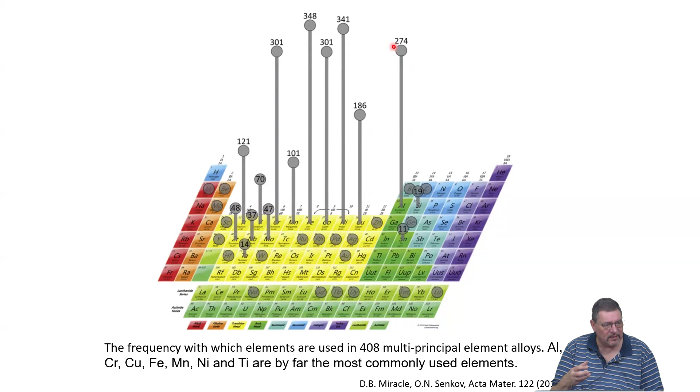This is very important if later we come to analyze the typical phases of solid solutions, because you see that it's only a very small number of elements that are used heavily in making these alloys. So it means that the structures these elements prefer will obviously, or maybe not obviously, control the phase formation in the high entropy systems being made.

When we look at this, maybe it's not very visible on screen, but this is actually a box, and this is another one. So again, many high entropy systems are made of 3D transition metals, and they are the most abundant when you look in the literature.

Refractory CCAs and refractory high entropy alloys are much less abundant, much less investigated. So there is a lot of work to do in terms of their microstructures, phase transformations, mechanical behavior, diffusion behavior, all of these aspects.

Then there is a rather small number of, for example, precious metal CCAs, making a high entropy alloy or compositionally complex alloy just based on precious metals. This is, for example, if somebody wants to make a new catalyst and wants to leave out certain very rare precious metals, people are trying to use the high entropy concept to make a replacement with similar properties but less cost.

And then also low density CCAs, based on elements which have a low density by themselves, are also there, but not in abundance. So there are not many of those reported in literature.

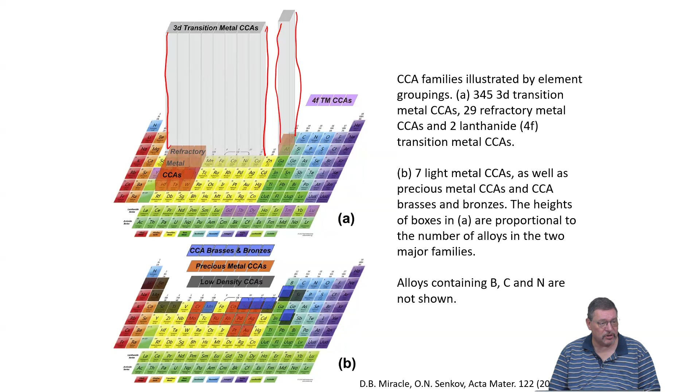We discussed already that there are different conditions relying on different properties in terms of stabilizing complex solid solutions. This mixing enthalpy as well as the difference in effective atomic radii in solution are the two most important, I think. The similarities in these properties between different atoms and atom pairs control whether you can easily make a solid solution or whether you will probably find formation of an intermetallic phase, which most of the time is to be avoided.

These more complex structures are very rare, and often they form as precipitates in given high entropy systems when they are annealed at lower temperatures, so that they go from single phase to two-phase or multi-phase structures, especially decoration of grain boundaries, triple junctions, and so on.

This is not related to the fact that FCC or BCC have special structures, in my opinion, but because the elements we use to make these solid solutions have to have similar properties that favor FCC or BCC structures. This is why I think we see these phases in abundance.

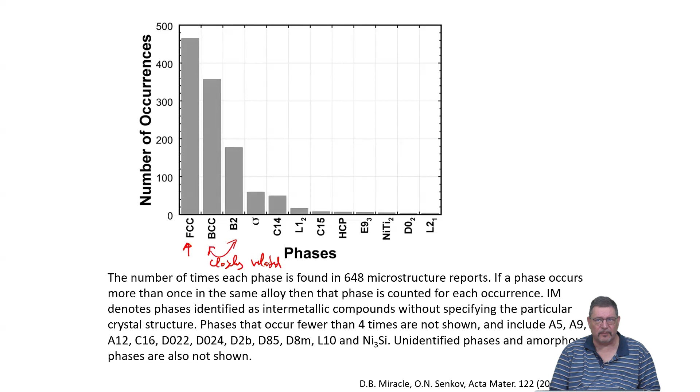There's no magic about these structures, FCC or BCC. It's what people in the literature call the structure in, structure out approach. It's a hand-waving concept where you take alloying elements that have, in their natural single element case, a preferred structure - that's the structure in. If I add several elements that prefer the same structure in, this will most likely result in structure out in the phase of the solid solution that forms when mixing them.

This structure in, structure out thinking seems to be fulfilled for many high entropy systems. Even though, as I mentioned yesterday, for the Cantor system it's not that the majority of elements in their natural form would be FCC, but still the similarity between these different elements is there. Nickel, for example, is a good example of something which really strongly prefers FCC structure. So this approach seems to work.

So when you think of trying to make a high entropy alloy with a specific structure, and you think about which elements to choose, think of the radius in solution. How is the mixing enthalpy between this element you might add and the given elements to make a solid solution alloy? Is the crystal structure, especially close to the melting temperature, of that additional element close to or identical to the crystal structure which the other alloying elements form? If that's fulfilled, this is maybe an excellent choice for getting a solid solution.

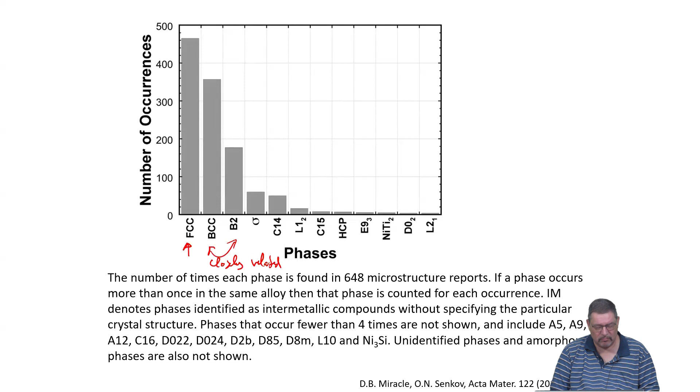So alloy design in multi-component space is still relying a lot on estimating things and having some experience. But these empirical rules, which don't really have a good physical foundation, are working. A working approach is never to be sneezed at. This is what one can easily do.

This is also confirmed if we look at the comparison between experimental observations of phase content and estimated content. Observed content means either experiment or CALPHAD simulations, and estimated content is this structure in, structure out approach, which you can do in experiment but also based on CALPHAD calculations. You see that basically this grayish line lies in between these different data points.

For CALPHAD, there are two sets of data given: this factor FAB equals 1, or FAB equals all. That means the fraction of data sets which have been assessed of the binary A-B systems that make up your 5-component system. So if all 5 binaries have been thermodynamically assessed - completely calculated by CALPHAD and confirmed that reality matches the CALPHAD calculation - then FAB would equal 1. So a fraction of 1 means all of them have been assessed.

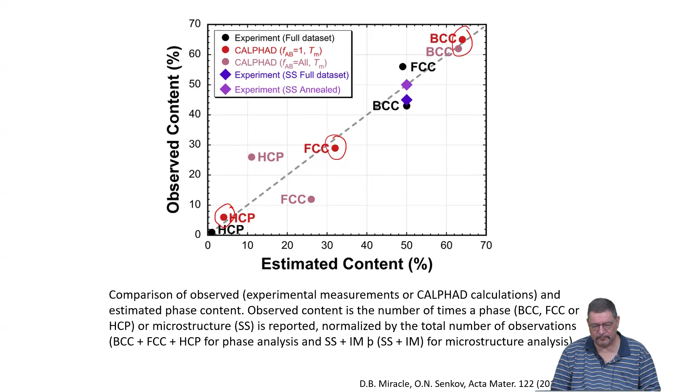Now, when we were talking yesterday about conditions for selecting elements to bring together, to mix in an alloy to make a high entropy system, we were talking first about these delta values for the mixing enthalpy of the solid solution, delta HSS.

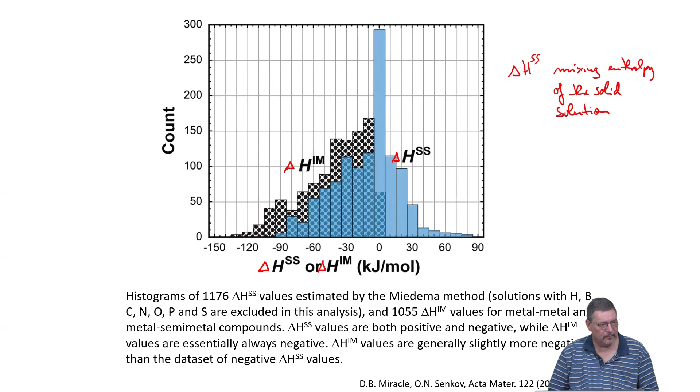And then we have to compare it, obviously, to the formation enthalpy of intermetallics, which are possible inside of the system. You see that they are comparable, but that on average the formation enthalpies of intermetallic phases in these systems tend to be a bit more negative, which means this is the hard job for the entropy of mixing to keep up and prevent intermetallic phases from forming.

This is why at low temperatures in all of the high entropy systems, you expect additional phases to form. Sigma phase is one example. So this will be, I think, a general trend and tendency.

The time for forming these intermetallic phases at lower temperatures might be very long, because the diffusion coefficients of the elements inside these materials is very low, and you need diffusion, you need atomic mobility for the phase formation to occur. So the comparison with these predictions is a little bit difficult, because you never know ahead of time how long it takes.

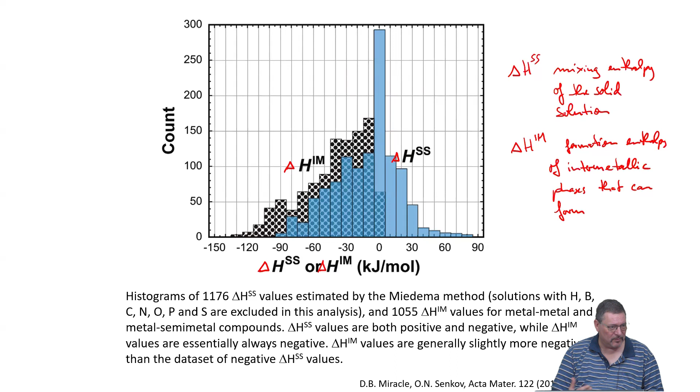In the literature we have very similar concepts which have been introduced many decades ago, and they have been reformulated not so long ago by Professor Inoue from Japan, but it's basically still going back to old rules by Turnbull, who did this in the 1950s and predicted in the 60s which ratios of properties would favor metallic glass formation, because at that time it was still not yet confirmed that you can make metallic glasses.

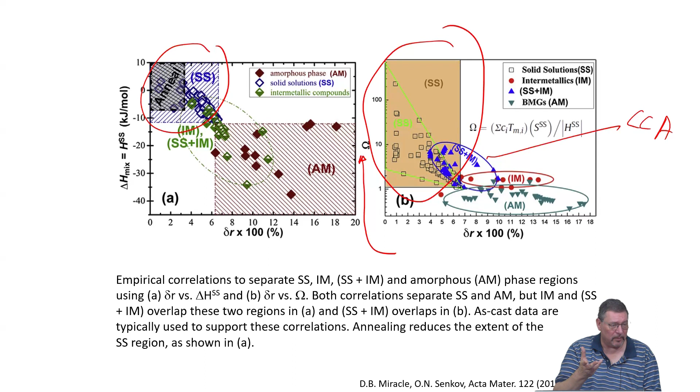Suppose during printing, during solidification, cracks will form. Yes, that is also a possibility, that is always a possibility. So then you have to basically change processing conditions. It's not related to thermodynamics, it's just about intrinsic strains. You maybe have to think about how your cooling method is affecting crack formation, whether you need some stirring, or whether you need to do Bridgman solidification to get closer to equilibrium configurations, which avoids building up stresses so much.

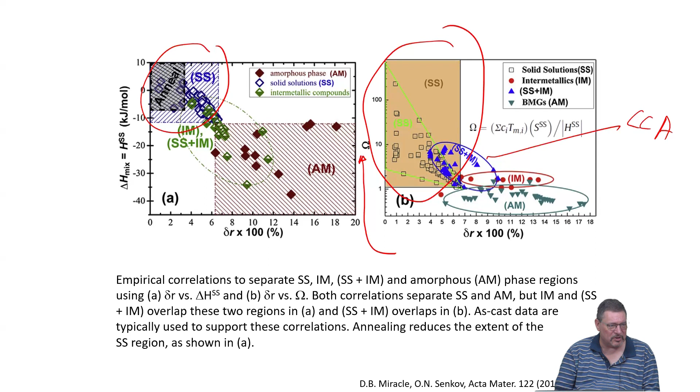This brings us to preparation methods, and I think in general they would not differ much from what you do for conventional alloys. So if you want to make a good high entropy system alloy, constituent selection is really the most important aspect.

They are chemically complex, so you have to think of putting different elements together. Different elements have different densities, so you get buoyancy effects, you could get segregations. So you always go through this iterative cycle: you try out a certain alloy with a certain number and type of constituents, you try to make it, you look at the outcome, you see cracks have formed or segregations are there, and then you know some improvement must be made. So maybe you go to a higher soaking temperature, soak for a longer time, or flip after initial melting several times so that the density differences get levelled out. Only by this repeating and improving can you get the best alloy.

Obviously this is counter to any industrialized process because it takes time and costs money. This is the difference between doing fundamental research and industrially applied research. This is why industry doesn't like at all to go to new alloys and new compositions, because you have to go through the whole process and optimize all the parameters to get a good product. This means that alloy development is mostly done at research institutions, or maybe companies together with people in research institutions, but very few companies really do this themselves.

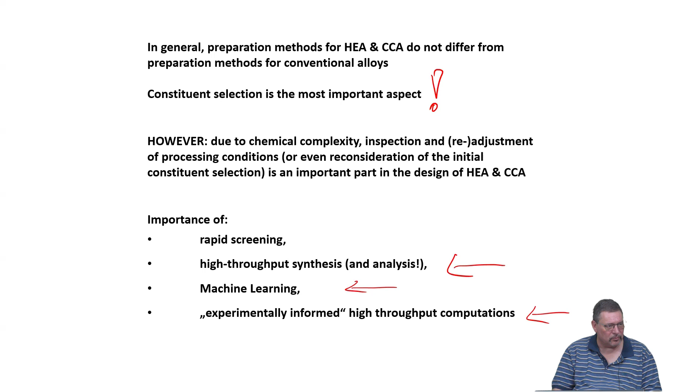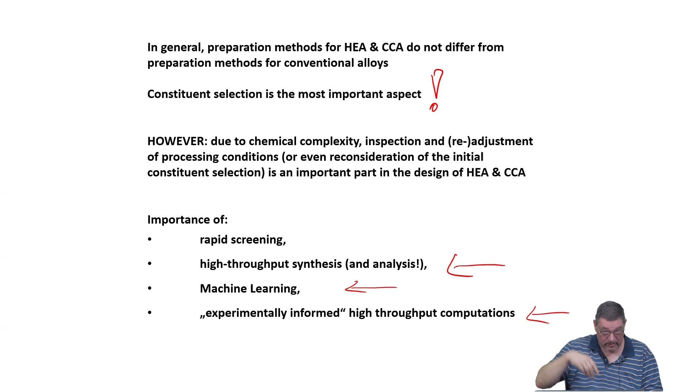In the coming years, it will become even more important to have machine learning as well as experimentally informed high throughput computations, but also synthesis in high throughput and analysis in high throughput. By deposition processes, you can make libraries of materials on a single substrate, going from pure element to maybe Cantor alloy in one go just by changing the deposition rates of different elements.

The big issue here is how to relate thin film behavior to bulk behavior. This is not easy because you have additional stresses, a huge surface area, different diffusivities, and maybe different quenching rates if you deposit the film, as compared to bulk processing. So one has to be very careful there.

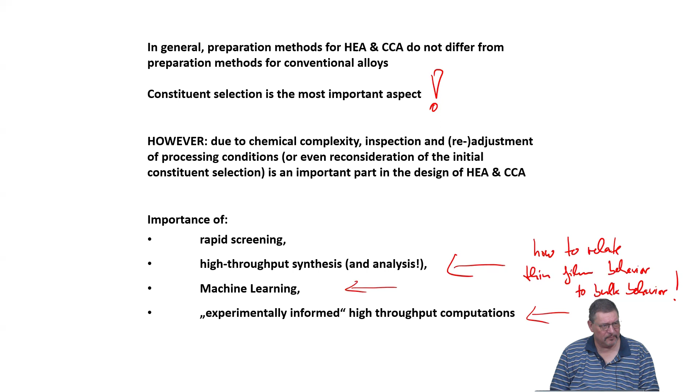This is done in abundance all over the world, but I'm skeptical. This is the typical general synthesis route, and for high entropy systems, mostly mechanical alloying, these typical classical solidification methods, thin film deposition methods, and in the middle, bulk casting and additive manufacturing are the ones which are used.

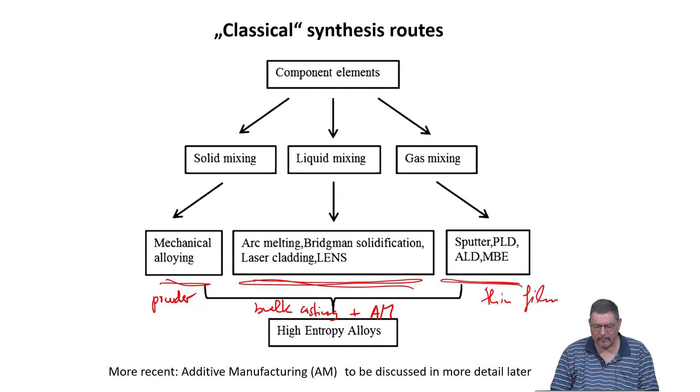So arc melting, you probably know. It's obviously a process which works very well. You just assemble different ingredients and use a high power electric arc to melt the material while it's situated on mostly a water-cooled copper plate. Then you go through the liquid phase, and once you stop the beam or take it away, the material freezes again.

When you did this yourself, what are the problems with this method? This is a very common problem: copper diffuses into the material although the copper plate is water cooled. If you go to very high temperatures of your ingot, for example melting high melting point materials, you cannot prevent copper from going into the material because the heat cannot be taken out quickly enough. Then arc melting is really a difficult problem—if you don't want copper in your material, it's very, very tough to prevent. So for me, that method is good for something up to the melting temperature of iron maybe, but if you go higher, it is very difficult.

If you have components of very different melting temperature, it's also a problem because you will have selective evaporation of the component with the lower melting temperature mostly. It means the stoichiometry of the ingot you produce will not be identical to the nominal composition you put in.

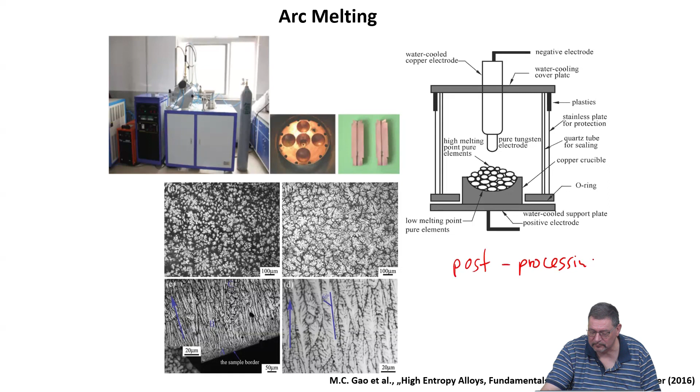I recommend not only doing a homogenization treatment, but once you have melted the alloy several times so that you have compositionally homogenized it, it's normally a good method to severely deform the material by rotary swaging or hammering, and then do the homogenization treatment. Or maybe do homogenization annealing, then deformation, and then relaxation or recovery annealing, because that will give you not only compositionally uniform material, but also microstructurally much more uniform material than if you do not include this mechanical plastic deformation treatment in between.

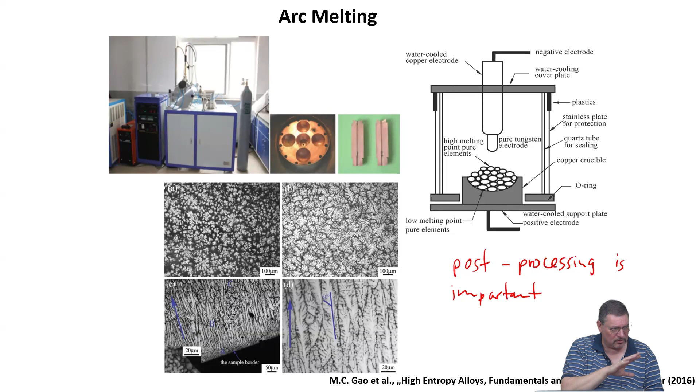This has a huge impact on diffusion rates, as we found out. The diffusion rates which we measured without doing this intermediate deformation step were much different than for the material going through the full cycle I just described.

A very good method if you want to avoid these non-equilibrium artifacts is Bridgman solidification casting, which means that you basically pull the material from a liquid zone through a solidification zone and cool it, but cool it gently and not so quickly. So you have control over the speed of the solidification front.

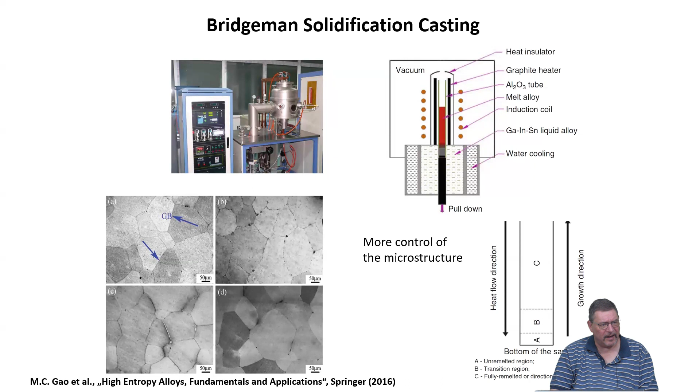That normally gives you good materials in terms of equiaxed structures, non-dendritic structures, good sharp grain boundaries, and also nice dihedral angles or tetrahedral angles at the junctions of grains, as shown here.

So depending on how fast you pull in this Bridgman solidification casting, you get different patterns of the microstructure in this high entropy alloy. The faster you pull - and D would be the fastest - the finer microstructure you get, because you allow the least time for the material at the high temperatures to form the local structure.

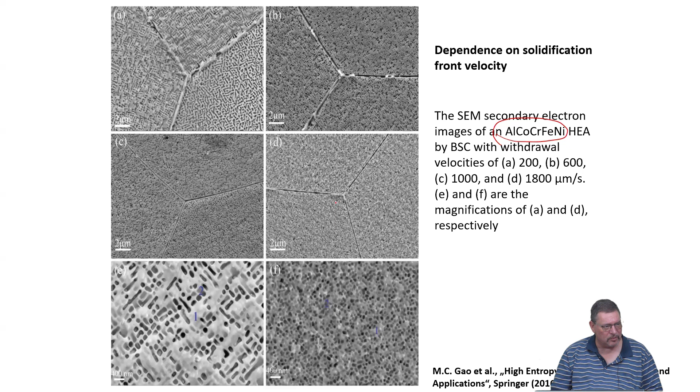It depends really on the alloy what you have to do, because sometimes you want these features to be larger or smaller, and then it means you can play with the solidification front velocity in this Bridgman solidification to obtain the microstructure which you like to have.

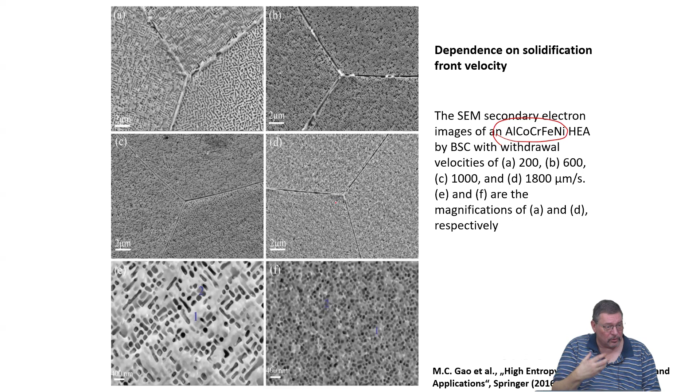In alloys made by this method, you don't need this deformation process in post-processing, because then you would destroy the microstructure, right? So you have already used a process that makes an optimized microstructure, and it gives you control over the resulting microstructures.

Laser melting and laser cladding, very similar to additive manufacturing really, is basically you have some powder which comes through this nozzle, and you have a laser beam which melts the powder at the place where you want it to form some material. So it's like a directed deposition, like we also have in additive manufacturing.

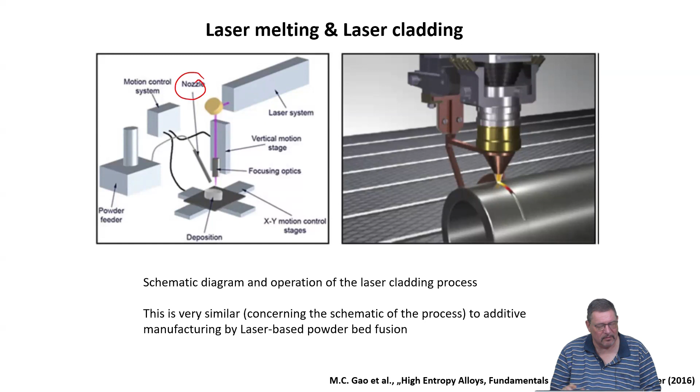Obviously, we have all the pros and cons as for arc melting here, because also rapid solidification, directed heat flow during cooling - microstructures that form are probably far from equilibrium. So again, one needs to do some post-processing treatment if you are not interested in this metastable microstructure. If you want a stable microstructure, you have to do some annealing, maybe even rolling and annealing, in order to form a good equilibrium structure.

And otherwise, it's often that you see dendritic type solidification structures, which again tell you there was a rapid solidification process and either constitutional or thermal undercooling, so the solidification front became unstable and dendrites formed.

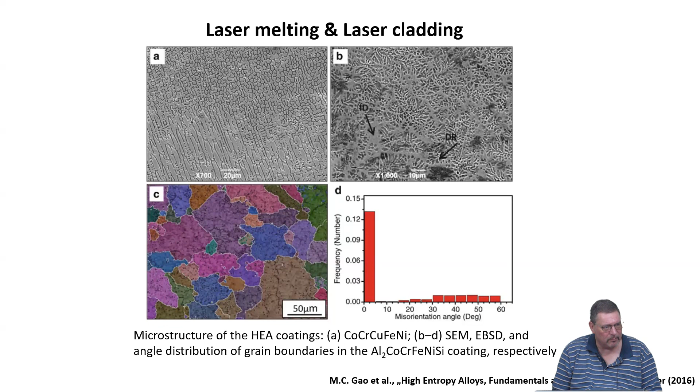If you want to do powder metallurgy, you all know ball milling, and there are two general types: it's like a tumbler or an attritor ball mill. They just differ in terms of how much energy you put into your material, which you either blend or severely deform.

Whenever one does these experiments, one has to be aware of restrictions. This is typically a process that occurs far from equilibrium, because you transfer a lot of kinetic energy from the balls or from the mill itself to the powders, which means defect densities are exceedingly high. Local temperatures could become very high with associated very high cooling rates. So the whole material is in a non-equilibrium state very far away from equilibrium, and so you could get metastable phase formation, amorphization, and so on occurring.

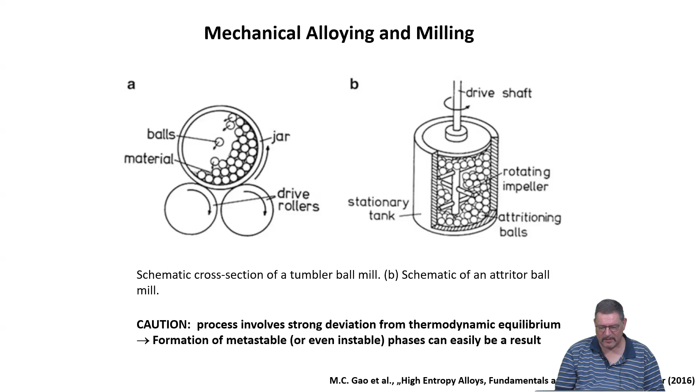But also you always have some material from your mill or from the balls inside of the mill abraded and mixing with your original material. So it means you can never avoid some impurities from the materials the mill or balls are made of going into your material. If you're fine with this, or if the mill is steel-based and you have an iron-based alloy, then maybe it's not such a big deal. But if you don't want iron in your material, maybe use a different ball mill - there are some based on tungsten carbide, and then you can avoid getting these mixing effects into your material.

You can also use pulsed laser deposition, again using a laser to evaporate from a target and then deposit on the substrate. Or you could thermally evaporate different materials in effusion cells, Knudsen cells, and then have a small pinhole so you can direct a beam onto a substrate, and depending on how many sources you have, you can basically mix different alloys.

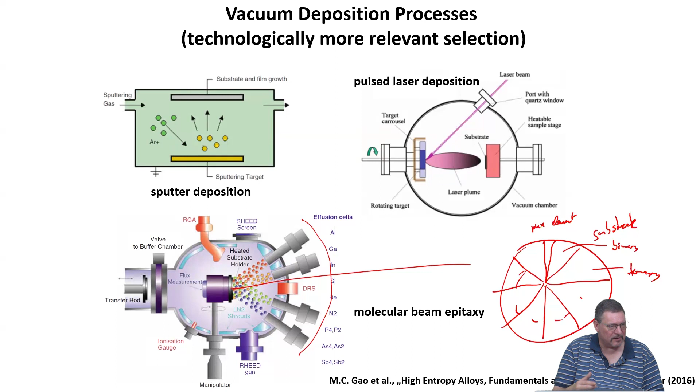Additive manufacturing is very hip these days, and everybody investigates it. It is basically similar to laser cladding, right? I mean, you cannot only use lasers, you can use all kinds of energy sources in order to do the additive manufacturing.

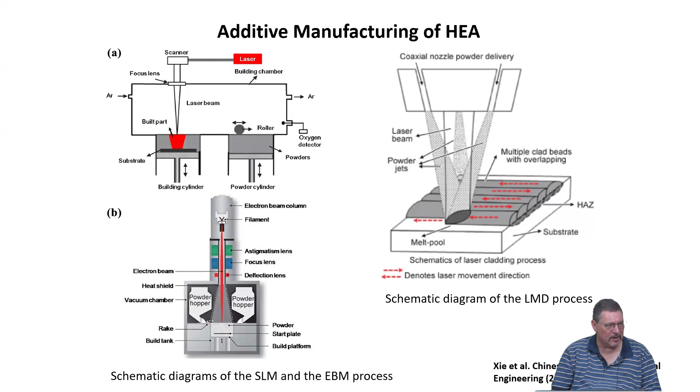I think most people using high entropy materials use this laser-based process, powder bed fusion. So you basically have a powder of your material you want to make a structure out of. You put it down in a layered fashion, and then you scan with a high power laser in the regions where you want to create a structure. It melts, it freezes, and you take the rest of the powder off. You can even reuse it, and only the structure is created in the positions where it should be. So you don't need to machine out material, especially for high cost materials like high entropy alloys - this is a favorable way to go.

And let's see if this works here... No, unfortunately not. Well, this was showing the process. Okay, thank you. Can I do it like this?

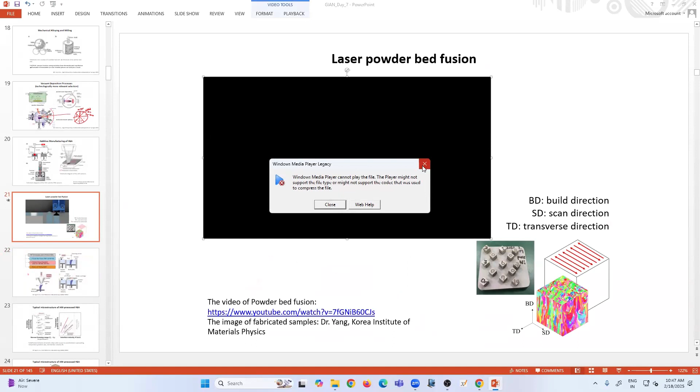Sorry, on my laptop it worked, but here it seems not working. But basically, it's showing you this setup of how the laser works, because this powder is then distributed.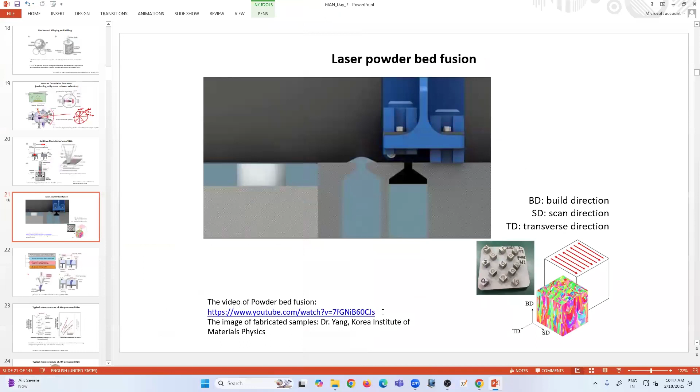Powder is distributed along this direction. Then this slider goes back with this one lowered. It basically scrapes off the powder which is too much, and it falls here into this container so that it's not wasted.

And then basically the laser comes down and melts the powder in the regions where it should be melted. And then the next powder is applied, and so on. And so you build up these structures, as you can see here.

The problem here is that you cannot avoid obtaining structures which have a very, very anisotropic microstructure, because the heat is extracted in this direction, a little bit in this direction, and a little bit in this direction, but mostly in this direction.

And the next layer will again deposit heat, and the next layer, and the next layer. So it means you will always see the tracks of your deposition melting.

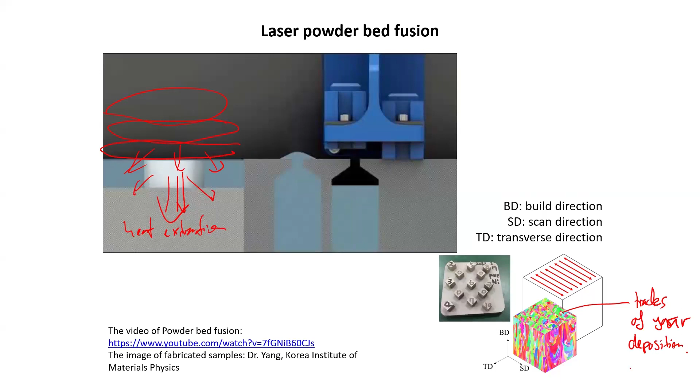And you will also see the outcome of the heat flow. And that gives you a very, very complex microstructure.

Also with a lot of defects because of the rapid shrinkage and rapid solidification. So you introduce a lot of strain because of shrinkage going through the liquid to solid transformation and due to the cooling. And that means you create strain, which can also introduce huge dislocation density.

So the strain is actually large enough to go above the elastic limit into the plastic regime. And this is a highly defected structure which you get.

So it means that when you want to use it, you probably have to do some post-processing, which is against the idea of additive manufacturing, because you would like to take the part and put it into your device, but this is probably not going to happen.

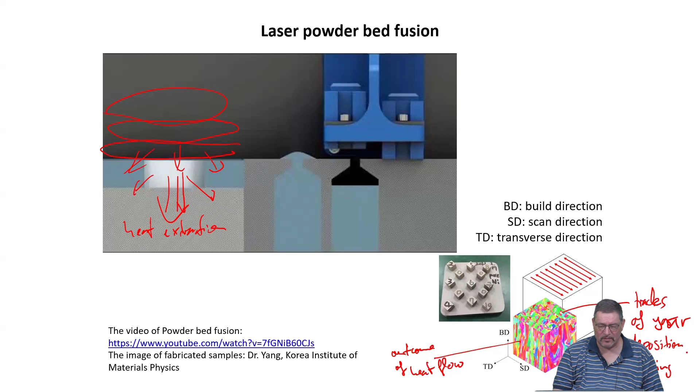This is not only true for the high entropy systems, but also for others.

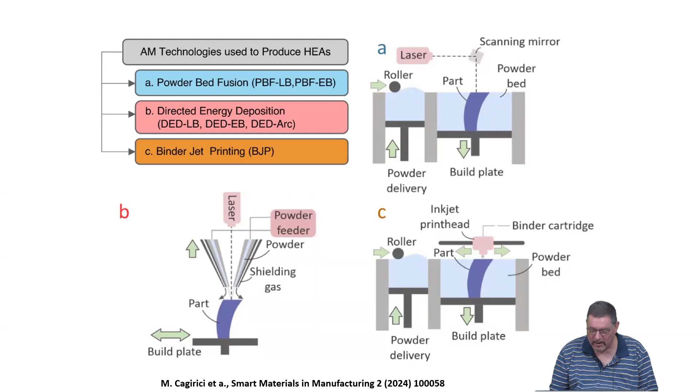Yeah, and again, different ways of either directed energy deposition, so you don't have a powder bed, or powder bed parts. In principle, they all have the same benefits of making materials without having to machine them in much strong way afterwards, but also all of them suffer from creating non-equilibrium structures.

And depending on the increasing constitutional supercooling, which is proportional to... it's really related to many of the processing parameters, like how do you deposit the energy, how much of the energy do you deposit, and how much time you give the system to either melt or cool.

You will get additional different constitutional supercooling. Normally cooling speed is proportional to supercooling, and then you get from a planar equilibrium structure something which is more related to Bridgman solidification, to something which might be very dendritic, similar to what you get in arc melting or laser cladding.

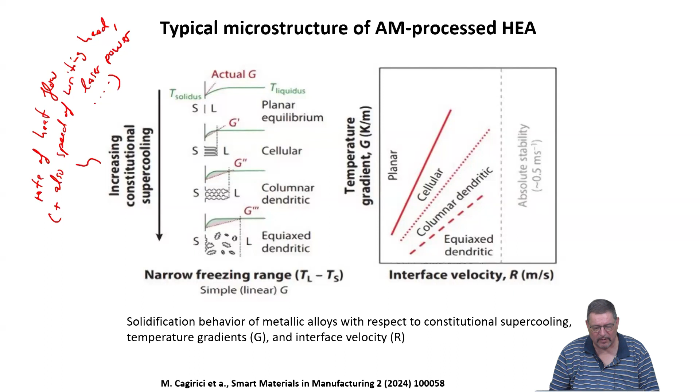And obviously one does not like to have very dendritic microstructures. But yeah, this is what you typically get in microstructure evolution of an additive manufactured processed high entropy system, and that's actually now a two-phase high entropy system.

It's a eutectic high entropy system. And you can see that the microstructure variation is quite large, right? So the properties of this material would depend a lot on whether you look at the properties in the transverse direction or building direction, because of these non-equiaxed structures that form.

So you have elongated grains, you have dendrites which form. So it can be messy in terms of the microstructure you get from additive manufacturing.

And one needs to really always analyze also the microstructure in all three different directions in order to get a full image and full picture of what really is the microstructure of the material. Just doing a planar cut through the microstructure like you normally do, polishing and looking at the cross-section, is not enough. You have to look at three cross-sections which are perpendicular.

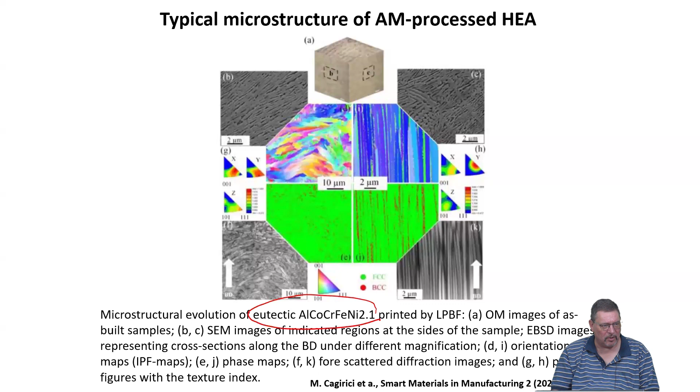Now, we also thought that single-phase and multi-phase high entropy alloys—while multi-phase is not really a high entropy alloy, this is why it's in parentheses.

So single-phase and multi-phase compositionally complex alloys are important to look at, especially because for properties and property optimization, more and more it's recognized that a single solid solution phase will not fulfill all the needs.

And we can use all the tricks we have learned from conventional alloys to make properties better also in high entropy systems by having second phases forming. Important is what I already indicated, that we then have to worry about the formation enthalpy of the intermetallics.

And they shouldn't be too much different from the mixing enthalpies of the elements when they form a solid solution phase, because otherwise they will dominate and only this, and then all the residual ones will form. And this is not what you're going to have.

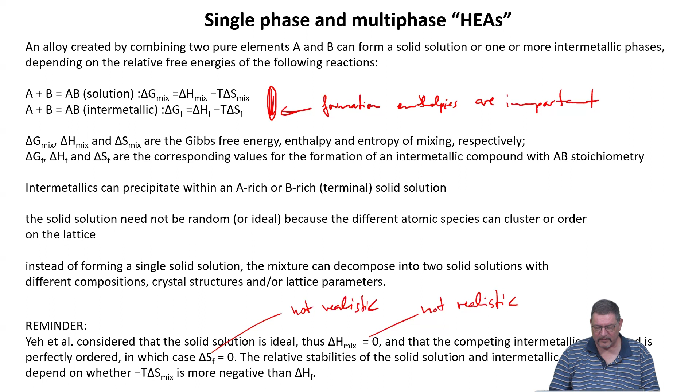So again, this is difficult, and this is what can happen, right? I mean, if we only place 2 different types of atoms onto a common lattice, so we form a solid solution, then different processes can occur. If we have slightly higher mixing enthalpy, positive mixing enthalpy,

then we can, in the solid solution, get spinodal decompositioning. This means it basically forms 2 different solid solutions, different in terms of their chemical compositions, because the system would tend to go to these 2 compositions.

We could have the situation that energetically it's more favorable to have more than 1 solid solution present. So this would be something like eutectic.

High entropy alloys. So you have 2 phases that coexist together, and both of them have multi-principal alloying elements. You could get to intermetallic and solid solution forming 2-phase equilibria. So it means CCAs would be this type of thing.

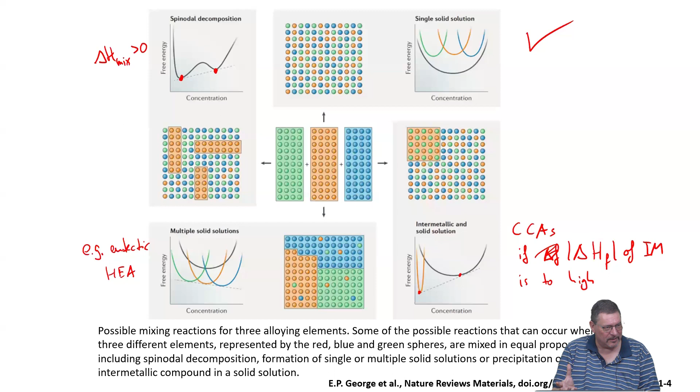If the formation enthalpy, the magnitude of the formation enthalpy of the intermetallic is too high, or we could get a high entropy alloy as a single phase solid solution. And all of these possibilities depend just on the thermodynamic quantities, but the thermodynamic quantities also depend on atomic radii, which are effective values, and depend on electron concentrations and so on.

When we now think of dual phase high entropy alloys, this is something which I think is more new, especially in iron containing systems, sometimes iron based systems. These studies have been like a continuation from steel-based research, because if you think about steels, some of them actually have rather large concentrations of additional elements in addition to iron, and all of them have a high number of functional constituents.

So typically like 10, 12, 13 constituent elements, which each and every one of them has its own function to make higher strength or higher ductility, higher work hardening rate, and so on. And one aspect here which people emphasize is that in these 2-phase, dual-phase high entropy systems, they can also get transformation-induced plasticity TRIP or twinning-induced plasticity TWIP effects.

And this is what you can find in these high specialty steels, which are very expensive. So there you pay by kg and not by ton. But this is what saves your life, for example, if you drive an expensive car too fast and you get an accident. Because these mechanisms can absorb huge energies, and this transformation can occur very

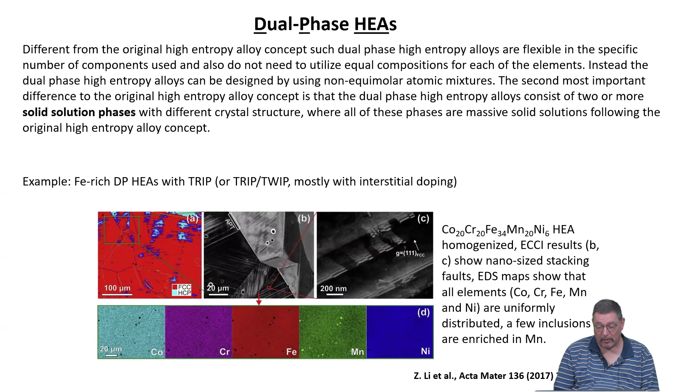By the way, are FCC and HCP related? Yes, exactly.

It's a stacking fault, right? It's a different stacking sequence. So you go from AB, AB, AB to ABC, ABC, ABC. And that just makes a transformation. They have both the same packing density. And this is why this process can occur so quickly, going from FCC to HCP.

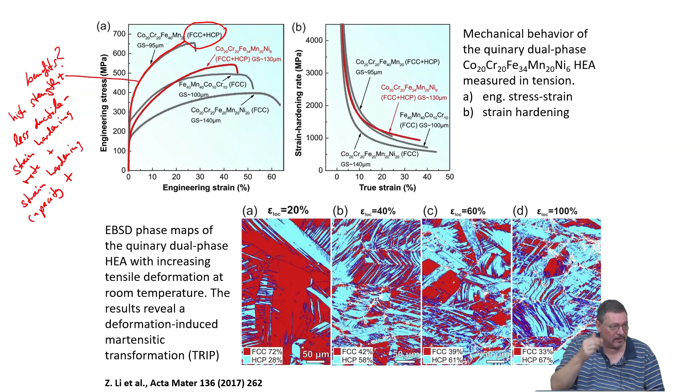Another dual phase alloy system is or are eutectic or eutectoid high entropy alloys, sometimes termed as EHEAs in literature. And obviously you know what a eutectic is, so it's the same concept, right? But you just don't have pure phases, materials A and B, or A and some intermetallic compound AB, AX, BY on both sides of the eutectic, but here you would have multi-principal phases which make up this eutectic structure.

And also there you have many beneficial properties, especially in terms of the mechanical properties, so high strength and good ductility, because of many phase boundaries which you are having in the material. So here you would not have a transformation-induced plasticity, but you have a dual phase eutectic microstructure.

Which microstructures do you know in eutectic systems to form? Yes, you can have rod-like, you can have lamellar, you can also have dendritic, and all of this is basically what you also get in eutectic high entropy alloys. Depends again on how you design the system in terms of composition and how you design the process going from liquid to solid and doing or not doing post-processing treatment.

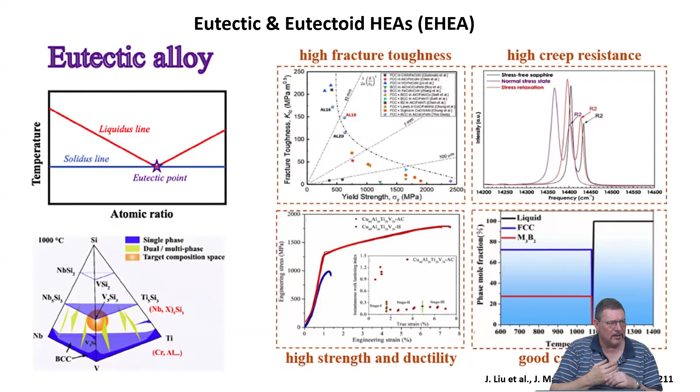The quintessence of this is delta H, delta S work nicely, otherwise systematics are poor, but statistics are poor anyway, because there are not so many eutectic high entropy systems which have been reported and investigated so far. So as of today, these are the important criteria and conditions if you are looking for eutectic high entropy systems.

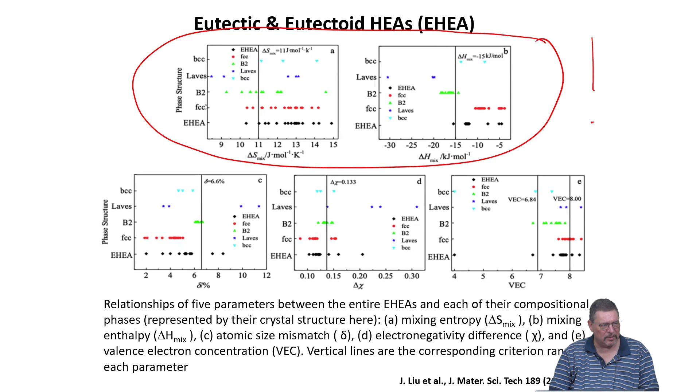And if you think of making a eutectic high entropy alloy in a material where nobody has done it before, and where you are not sure that the eutectic high entropy system can be formed, people are using these so-called network approaches. So you start from binaries or ternaries. You know basically when you start out from, let's say, start simple with a binary. And then you know when you add nickel, you go to a ternary eutectic, right?

Then you again know that iron and chromium, or if you would use chromium, you would get another eutectic. And this is why chromium and nickel have the same tendency for the formation of a eutectic, starting from the binary, and then iron is basically added without knowing it beforehand. So it means that you basically go from known eutectics, and then you add from binary to ternary constituents where you know that the eutectic is likely to form.

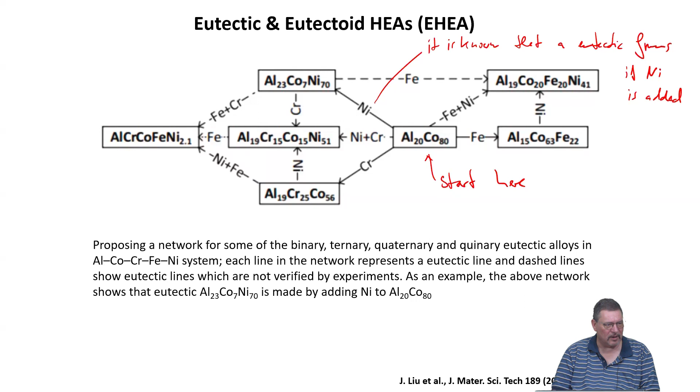And yeah, the simple way of thinking here is that when you basically have your eutectic high entropy system, you have the same microstructural approach and the same correlation of microstructure to property as for a binary eutectic, right? So you have a matrix, a stable solid solution phase, and an intermetallic phase that forms, but that intermetallic phase is also in itself a high entropy alloy. And then basically you go through that.

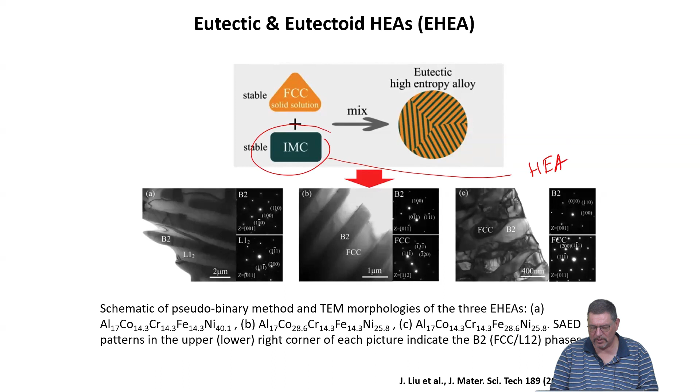Any questions about material selection, phase selection, element selection, what we discussed so far today?

Yeah, I mean, yes, in principle, yes. You can have any phase there is, and I think per definition, as people use it in the literature, just having high entropy alloy as one constituent, one eutectic phase, one lamella phase, let's say, and maybe a line compound even of only two elements at the other phase would also be a eutectic high entropy alloy. But the true sense of the meaning, and I think the most interesting properties, will be if you have a multi-constituent phase for both phases of the eutectic. You could have a Laves phase which has all 5 elements of a high entropy system.

But as I showed you initially with these number of phases reported for high entropy systems, the number of those known is very, very small. So one has to see if one wants to design such a thing, is there already a reported high entropy intermetallic in this structure you want to have? And then maybe this is the more important criterion to select your constituent elements.

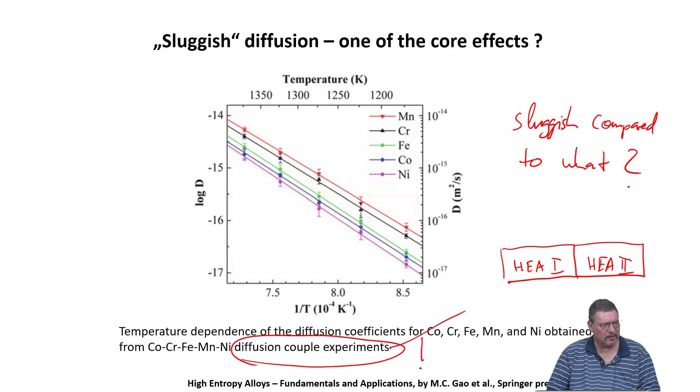These were done by diffusion couple experiments, right? So it means there were two blocks of material, both of different composition, placed together, annealed, and then basically the constituent element distribution has been investigated across the former interface.

So we have an interdiffusion flux of elements which are driven by chemical diffusion, by the gradient in chemical potential. This is not self-diffusion because there is an additional force term, in terms of non-equilibrium thermodynamics, which is given by concentration gradient, or gradient in chemical potential, to be more accurate.

Now, when we look again in the same paper, we see this comparison. So these are the diffusion coefficients in the system for the different constituents, the 5 elements. These are plotted for FCC crystal structure. Yes, all of this is for FCC solid solution.

If you change the crystal structure, it will be much different. What would you think? Yeah, it will change because like a BCC element will not go easy in FCC. But here you see the nice thing about the Cantor alloy is we have several elements in there which are not FCC, but the whole thing at sufficiently high temperatures is completely FCC.

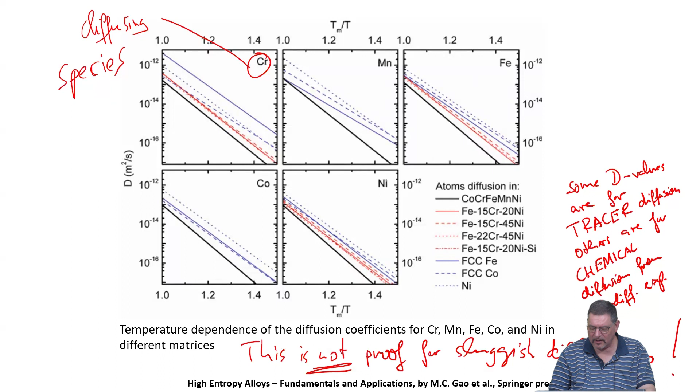Also, if it is within 1 order of magnitude difference, like in most cases here, it's very difficult to say, because you have an error bar also, which is not shown here. So it means, I would say this is not proof for sluggish diffusion. Right, so one needs to do better.

They also have shown here a plot, which is the diffusion activation enthalpy, which they name Q. And it's normalized by the melting temperature. And it's plotted for the diffusion of these elements in the different matrices, right?

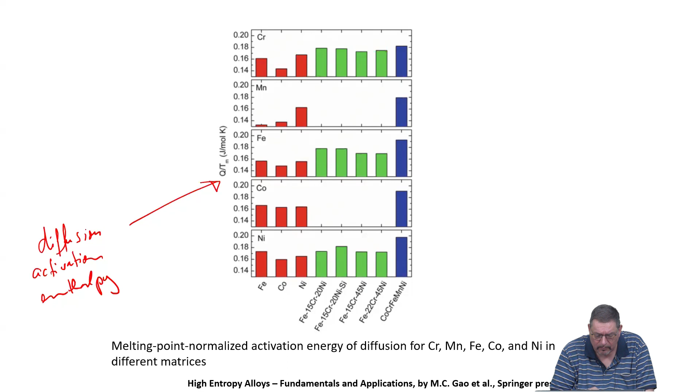So this is again the diffusing element, and these are the matrices. The question the experiments answer is, how large is the diffusion activation enthalpy, let's say, of chromium in pure iron, of chromium in pure nickel, and so on. And you see the activation barriers are normalized by the melting temperature in order to compare these different matrices, pure elements, up to the high entropy system.

And you see the pure elements are colored in red. The binary ternary alloys are colored in green, and the high entropy system is colored in blue. And when we compare it, then we see that the blue bar is always the highest. This suggests, by the authors, that basically higher activation enthalpy for diffusion means more sluggish diffusion.